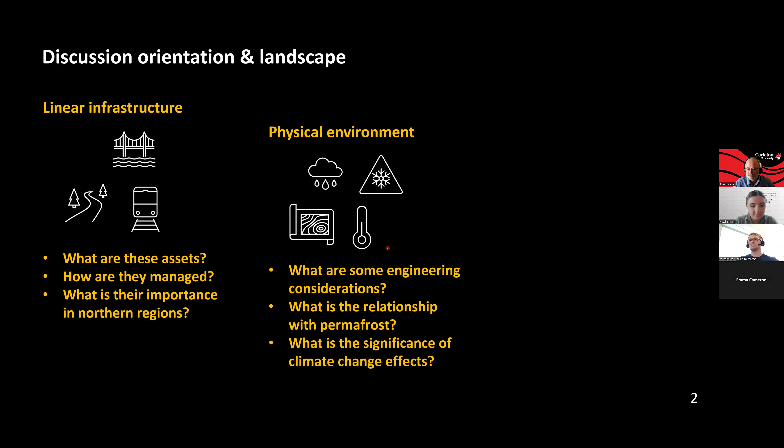In terms of the presentation today, I'm going to provide an overview of linear infrastructure. So what are these assets? How are they managed? And what's their importance for northern regions and communities? We'll try to look at linking that with the physical environment and what are some engineering considerations for the North. What's that relationship with permafrost, and what is the significance of future climate change effects that may impact linear infrastructure in northern communities? And from that, we'll look at some exploration through both case studies and also the importance of collaboration with Indigenous communities.

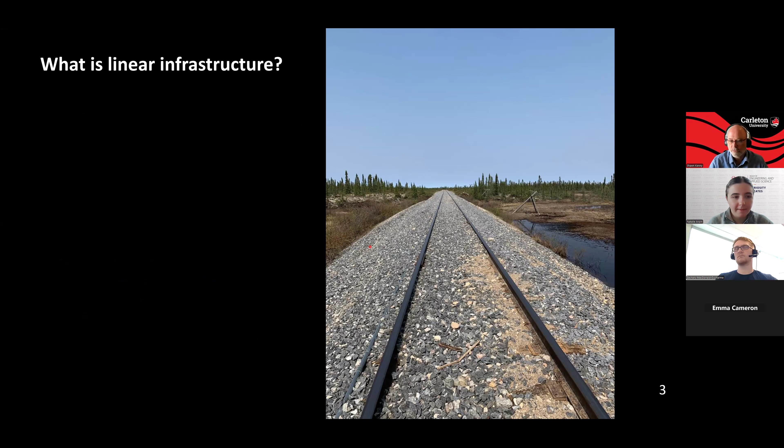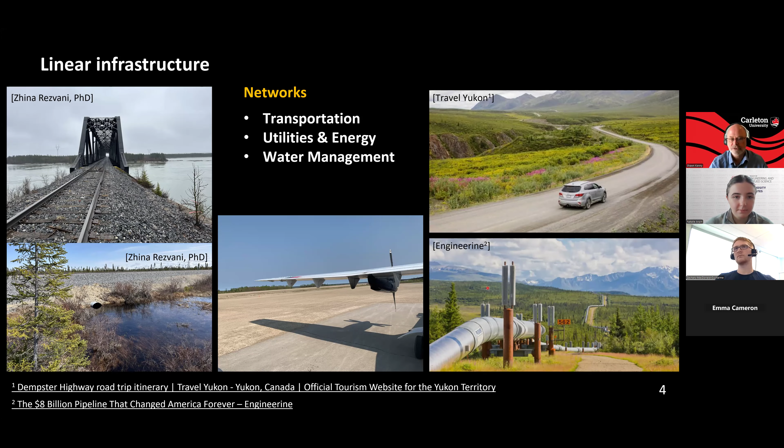And basically, in terms of transportation, they could be multimodal. So they don't necessarily have to just be roadway or railway. We may actually use a mixture of those types of infrastructure components. So for example, when we look at northern Canada in the Nunavut region, the use of sea lift is quite prevalent across the region. In the Northwest Territories in Western Canada, we also use barges through the Mackenzie River to transport goods downstream towards the Beaufort Sea.

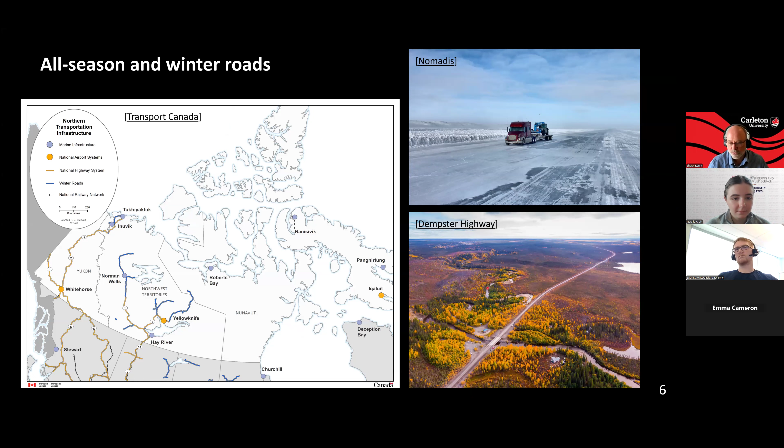We can also see in northwestern Canada, such as Northwest Territories and the Yukon Territory, the use of all-weather roads and also winter ice roads. So we see a prevalence of that type of infrastructure in the Northwest. In terms of railway, as discussed, I'll present through a case study the Hudson Bay Railway, which is in central Canada in the province of Manitoba. And that extends north through about mid-Manitoba up to Hudson Bay and Churchill.

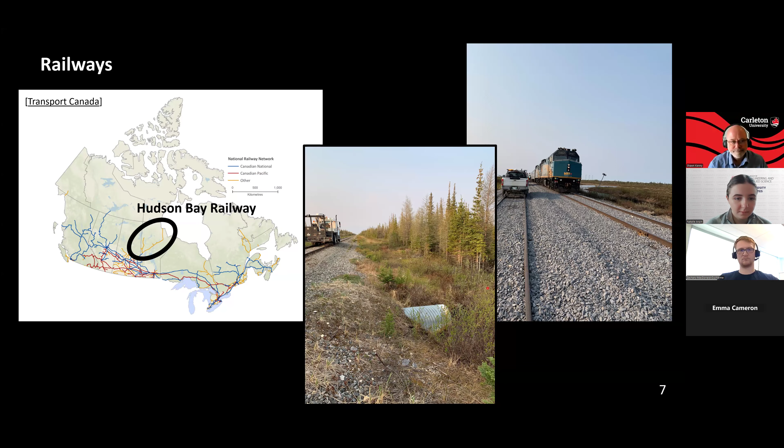In the north in Canada, we have both the traditional commercial airports in Yellowknife and Whitehorse that we think of as a paved or concrete tarmac. But we also see a range of locations where we have remote airports, and a lot of these remote airports will have gravel runways.

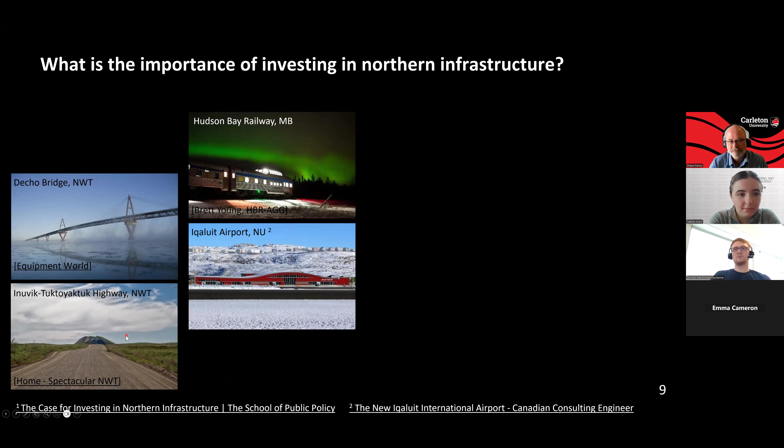So what is the importance of investing in northern infrastructure? And we can see different components of that infrastructure here, such as the Hudson Bay Railway, the Iqaluit Airport in Nunavut, the Deh Cho Bridge in Northwest Territories, and the Inuvik-Tuktoyaktuk Highway in the Northwest Territories. So we see different types of investment in northern infrastructure currently for northern communities.

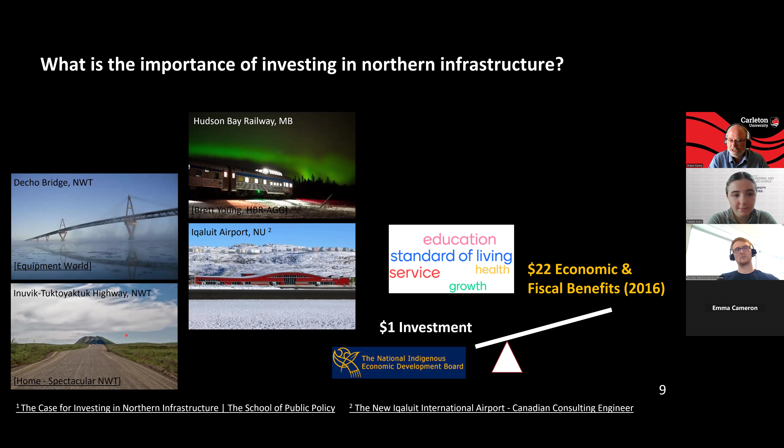And a study that was done by the National Indigenous Economic Development Board was looking at the importance of dollar investments in that infrastructure and showed that there could be up to $22 of both economic and fiscal benefits. So economic benefits to the person and fiscal benefits to the government, for example, through tax revenues. And that's related to education, our standard of living, our healthy lifestyles, food security, for example, and also the services that we rely upon.

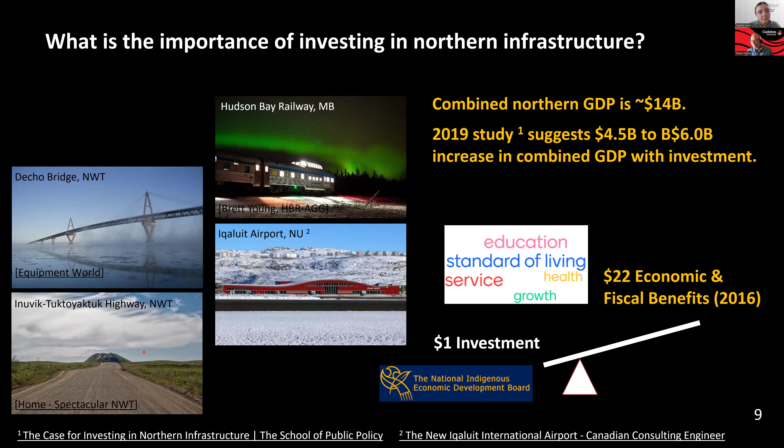Another study is looking at what is the combined GDP of these northern communities within the Yukon, Northwest Territories, and Nunavut. And it's around $14 billion. In 2019, the study suggested that by investing in a greater network of transportation systems for the North, it could add to that GDP by about $4.5 to $6 billion. So how do we relate then the infrastructure that's in the north with the physical environment?

Oops, I went backwards. Sorry, I went the wrong way.

So we can look at that through engineering considerations, and some of these are similar to what we'd see in more southern locations. We have to think about the asset type and the distribution. So, is it a railway? Is it a road? Are there culverts? Are there bridges? We have to think about how we are going to line that linear piece of infrastructure, such as a railway or roadway, which could extend hundreds, if not thousands of kilometers.

So we need to be able to assess the hazards along the route. We need to do site investigations. From those site investigations and terrain analysis, we'd look at selecting a preferred route. And for the north, which differentiates itself from the south, frozen ground engineering is a key component. So the presence of permafrost or the non-presence of permafrost, such as taliks, or other water bodies is a significant component that we have to think about.

The other component that's also different in the north is engagement with local communities, the indigenous communities, through their territorial and treaty rights, so that we can get their input to the project, and also commitment and engagement throughout the life of that project, both through the design and the construction, and then also through the lifetime of that asset.

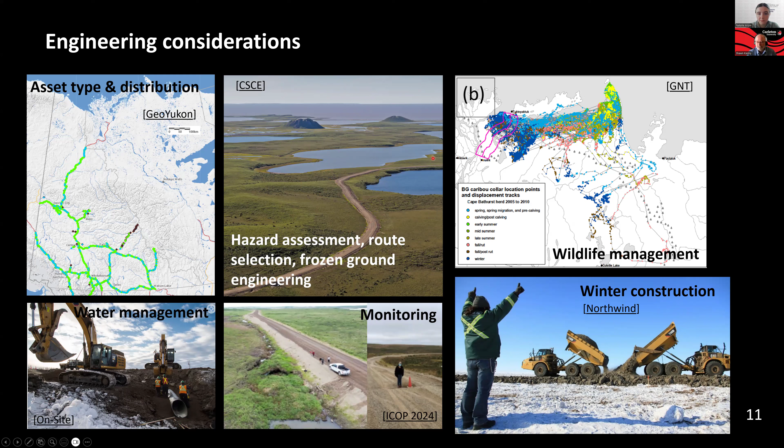It's advancing twice for some reason.

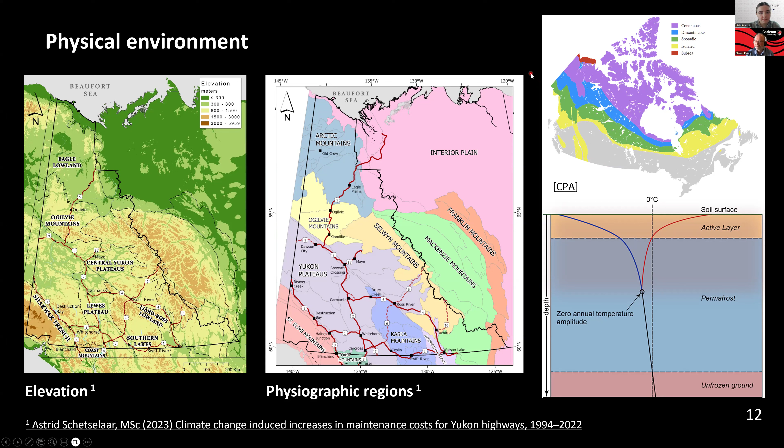We may also, depending on our location, have relatively warm permafrost, so close to zero, and colder permafrost, say -10 degrees. And this influences how the rate of thaw will occur over time.

And we certainly see some of those factors now when we're looking at both meteorological conditions, such as weather patterns, temperature, precipitation, snowfall, and also hydrological factors. So the runoff, for example, during the spring, or peak hydrograph runoffs that we see during the summer seasons in June and July, in some regions.

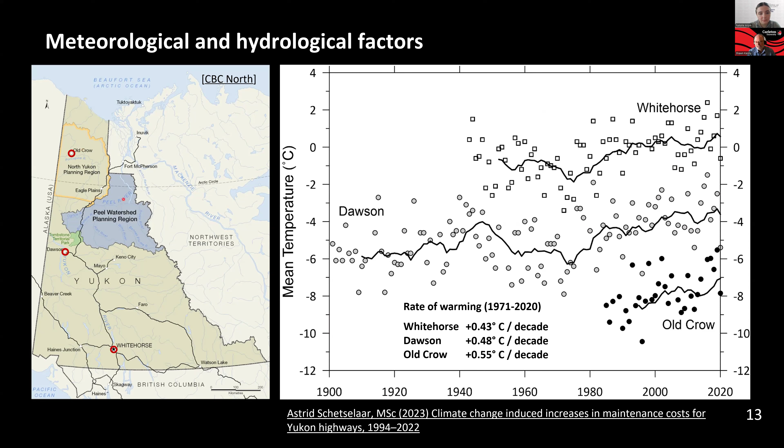So, as we know from climate change, there's a gradual increase in the mean annual air temperatures. And this is also influencing changes in the near-ground surface temperatures and also subsurface temperatures within the ground. And that's affecting permafrost stability, primarily in the form of permafrost thaw.

And from that permafrost, then, in terms of its response to climate change, we see that that can have a broad range of impacts, primarily in terms of just the physical environment itself. It's primarily threatening the way of life and the ability for local indigenous communities to sustain traditional hunting or fishing patterns. It's also disturbing ecosystems, in addition to impacting infrastructure, both in terms of its serviceability, but also sometimes in terms of its integrity or ability to actually perform its operations. So, for example, transport rail or transport cargo along a road.

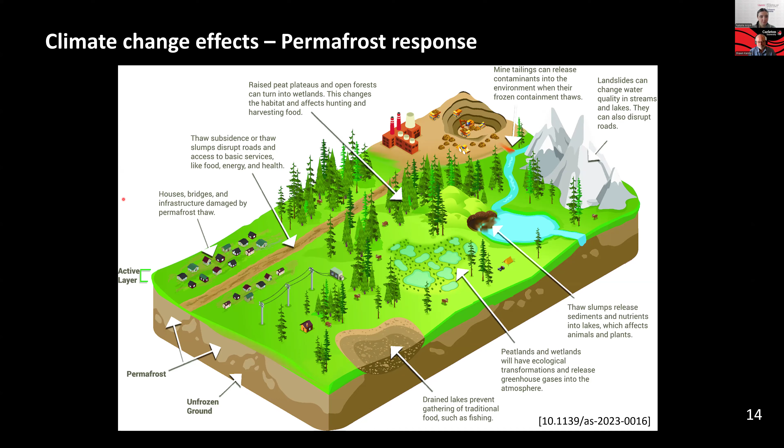There's many others affecting both flora and fauna in terms of those ecosystem impacts. And so climate change is having, in some areas, a devastating impact on the permafrost thaw and also then the local ecosystem and physical environment. And so when we look at our experiences from permafrost thaw and climate change effects, we see that they could be varied across different types of infrastructure assets.

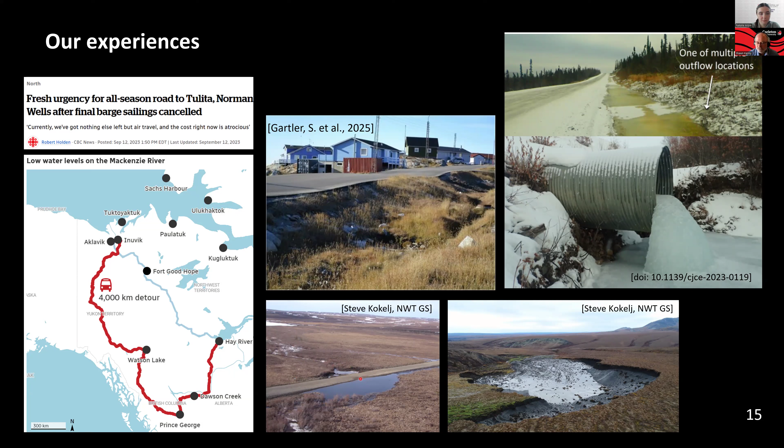And we also see other problems in the middle and also in the lower right in terms of permafrost terrain disturbances, whether they could be retrogressive slumps, thermal erosional type gullies, problems with water in terms of both impacting the roadway and also erosional features of that water onto the system itself. So we see that climate change is impacting permafrost thaw, which is then in turn impacting the performance of linear infrastructure and our ability to move goods or products and services to the north.

And a study that was done recently by Astrid Schetselaar looked at the Yukon transportation system, trying to determine the effects of climate-related costs on the operation and maintenance of infrastructure, primarily highway infrastructure and, for example, culverts in the Yukon territory. The primary trend that came out of that study is a general increase in climate-related costs. Depending on how we look at the data and interpolate through that, we see different rates, but the trend of increasing costs is there. It was correlated or associated with the different physiographic regions.

And in areas with greater than 50% permafrost distribution in that region, the cost magnitude increase was about double that in zones that had less than 50% permafrost distribution. So we see that the effects of climate change and permafrost thaw are definitely being seen in terms of the overall increase in climate-related costs for the Department of Transportation in the Yukon.

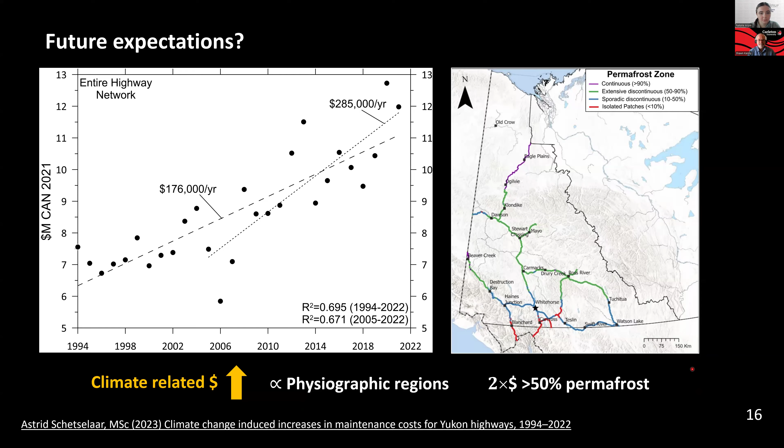So we can then think about different types of adaptation strategies, and some of those strategies are shown here, and they're mostly from the thermal perspective of how do we address climate change and how do we address adaptation strategies for protecting permafrost in these regions.

Shawn, if you don't mind me interjecting. Sure. If you could explain the difference between the passive and active airflow systems in the linear infrastructure design.

Sure. So we can see a number of different options here. And certainly this is a comprehensive study that has been conducted over some time by Guy Doré and others. But we see a series of types of adaptation strategies, from a very simple, passive one of insulation in the upper left-hand corner. And so that strategy is useful when the permafrost is cold. And the objective is to keep that thermal equilibrium of relatively cold embankments or ground beneath the insulation at colder temperatures.

The detractor from this approach is that it also keeps colder air out during the winter from actually penetrating into the ground in terms of stabilizing the permafrost as well. Another simple one is just looking at shading. So in the upper right, we see a sunshed, and that does also have abilities to improve the thermal balance at the surface. And so these are very simple passive systems.

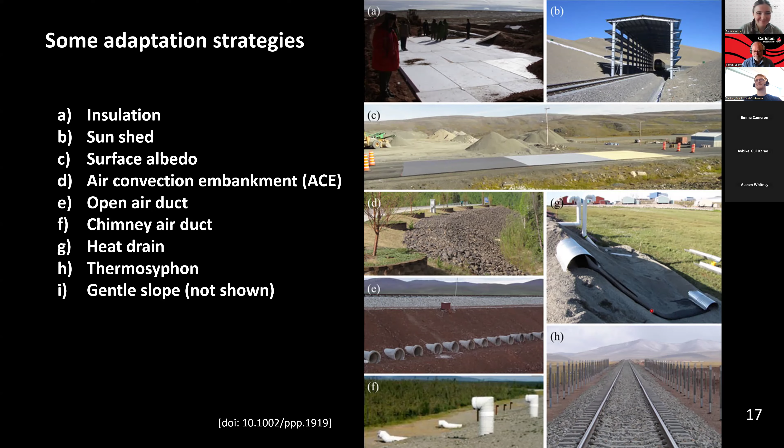So what we see out of that is there's interconnected relationships that we need to think about, and it sort of follows on from that discussion where not only do we just have to think about the one hazard, for example, permafrost thaw and subsidence, but how do we think about snow during the winter, and how do we manage that precipitation, which is more uncertain in terms of predicting what will happen in the future. We have a good handle on how temperatures may change under climate change events, but not necessarily on rain or snow precipitation and also their intensities.

But they all play an integral role with one another in terms of how we manage the snow, because that influences how cold may penetrate into the ground if we have embankments of snow adjacent to the embankment of the road. How that influences water flow during the shoulder seasons, both fall and spring, and how we control icings or glacier control on that system. And what do we do in terms of managing water?

So during the winter, for example, some of these culverts could get stuck or filled with ice and snow, and they may not serve their purpose immediately during the spring. We may then get slides or slumps and washouts and need for repair.

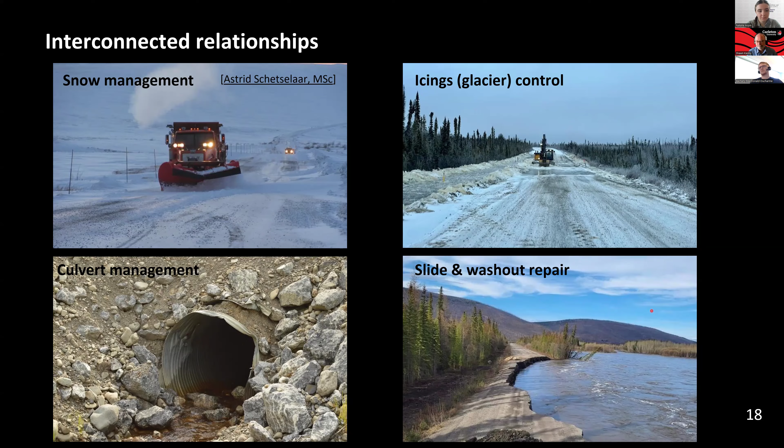And so what we can do is then look at that through two case studies. One is on the Hudson Bay Railway, as we see here on the left-hand side. So we have a drone shot of that image there, where we have a bypass. There's not that many along the rail, but this is one of those. And on the right-hand side, a second case study is in the village of Mayo in the Yukon, in the traditional territory of the First Nation of Na-Cho Nyäk Dun.

So when we look at the Hudson Bay Railway, it's located in Manitoba, so just west of Ontario in sort of central Canada. The railway itself is going from The Pas up north through to Churchill and Hudson Bay. So that's going from this range here in central Manitoba.

Originally, the thoughts about constructing this railway started in the mid 1800s, primarily to get goods such as wheat or other products such as beef to market in Europe. And it was looked at as a shorter route from Western Canada, such as Alberta and Saskatchewan, through Manitoba and out through Hudson Bay towards England, rather than going all the way through the US to New York and out. And so the idea was to build this railway.

Initially it was to Nelson here, but that has problems of sand accumulation at the mouth of the Nelson River. So the thought was then to move it northwards to Churchill. And some of these images here are from the late 1920s; construction began in 1910, was halted during the First World War, and finally the Hudson Bay Railway itself was completed in 1929. And the first shipment of grain was out from the port of Churchill in 1931.

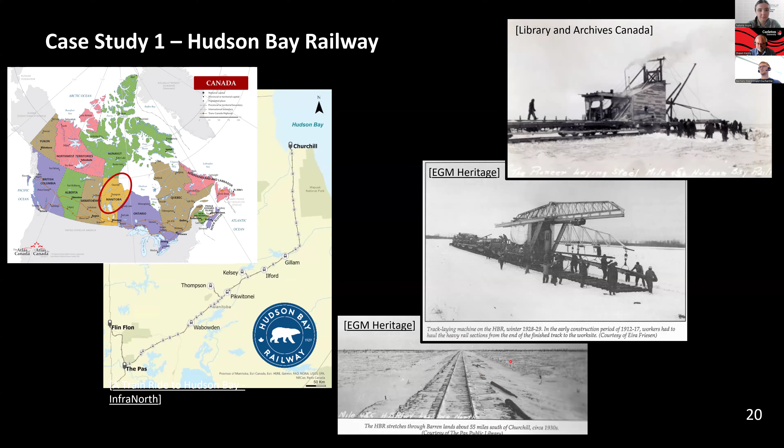And if we look through the Hudson Bay regional physical environment, we see a demarcation of post-glacial marine submergence here in the dashed line. So glacial lacustrine versus glacial marine type conditions. We see variations in the type of terrain units, such as organic layers, fen, or peat plateau, as we're moving from Churchill going south towards Gillam. And eventually, as we get more south and near Gillam, we get into the Shield and boreal forest.

Also, another aspect of that, because of the historical nature of this area in terms of glaciation, we also see as we move south from Churchill towards Gillam that the peat thickness is increasing with distance going south, anywhere from 25 centimeters and varying up to 400 in some areas, with mineral soil beneath that as well.

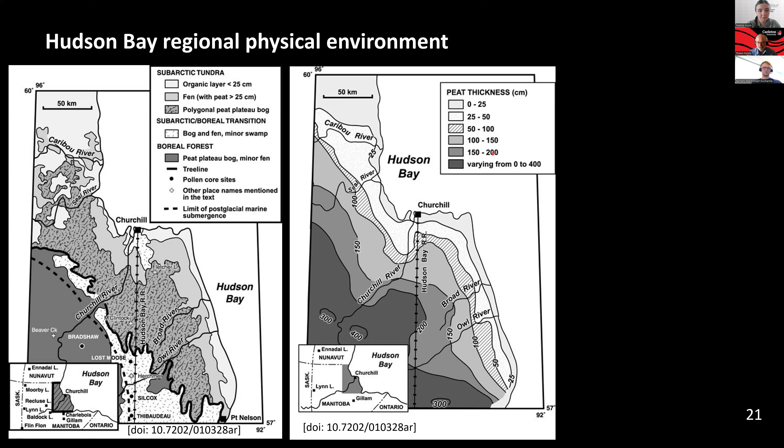For example, on the left-hand side of the image here near Churchill, we see that it's classified as subarctic boreal transition with bog and fen and minor swamp. This picture here on the right is actually just outside of Churchill, and it's one of the first culverts along the HBR, the Hudson Bay Railway, coming out of Churchill. So there are some minor variations locally, but the classification in general gives a good description of that area as we move from north from Churchill to south along the railway.

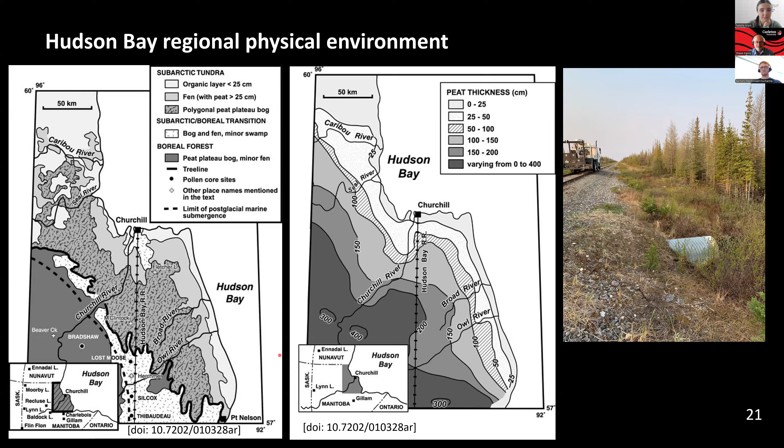So what are some of the engineering challenges that we see? The primary one is in the center picture of a core taken out from the soil itself. The project, and I'll get into some of that detail later, did a series of geotechnical boreholes to extract soil, a core or cylinder, and we can see the soil samples interlaced with ice lenses. The existence of the permafrost itself is a significant engineering challenge, and it has been since the railway was constructed back in 1929.

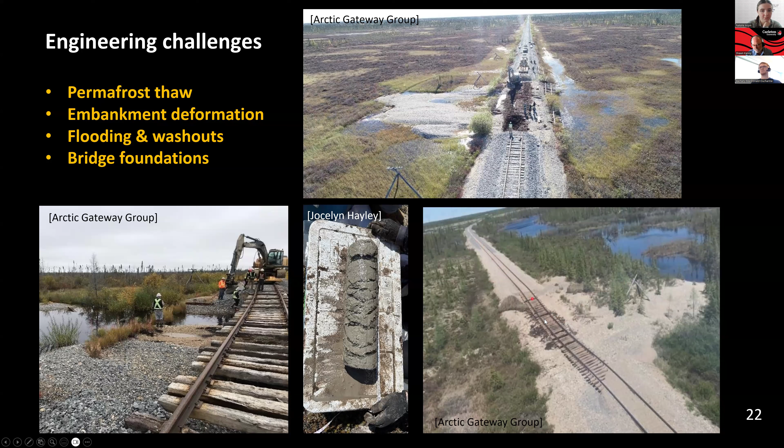The main ones are related to accelerating permafrost thaw due to climate change effects, and that's causing deformations within the railway embankment itself, which might be vertical changes in its elevation or subsidence, also classified as sinkholes from the Hudson Bay Railway's perspective. But as you see on the right-hand side, depending on how it's interacting with water and flooding and washouts, we may also get some lateral spread of that material. We also see in the right-hand picture the wavy nature through that subsidence and change in the profile of the railway itself.

In 2017, there was a significant flooding event, which cut off Churchill from the summer of 2017 until the fall. That caused significant washouts and flooding, and major damage to culverts and some bridges. There are also other issues with bridge foundations along the route itself.

And so PermaRail is a multidisciplinary project in collaboration with Hudson Bay Railway and the Government of Canada through Transport Canada. It's a consortium of people from the University of Laval, Carleton University, where I'm from, University of Calgary, Queen's University, and the Royal Military College. Hudson Bay Railway is a company underneath the umbrella of Arctic Gateway.

The overall PermaRail project is a major project running until 2027, where we're looking at both physical geography and understanding the terrain, for example how lakes drain and the evolution of ice wedges, through to how bridge piers are experiencing frost jacking, and also other issues related to hydrology and geomechanical behavior, as I'll show in the next couple of slides.

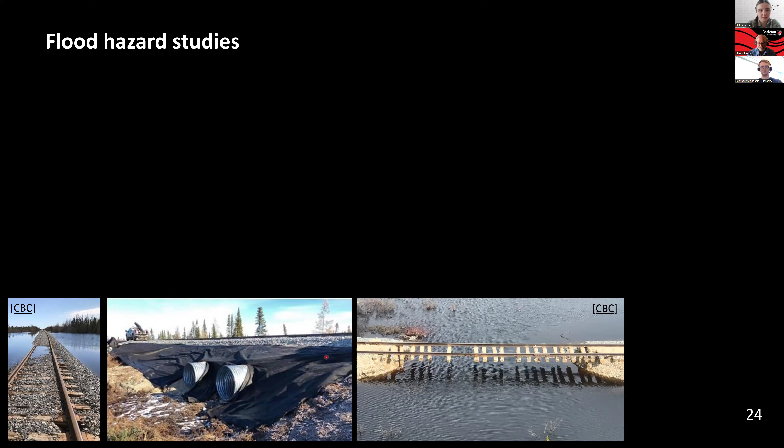From that, they had to go back and replace the embankment and any culverts, and in some areas add new culverts, as we see in the middle here, and put down some geotextile to try to provide some lateral support. In a lot of areas, they also put down geogrid to give lateral stability on the embankment. So I have a master's student, Adeleh, who's looking at a number of issues.

One of the first studies she did was looking at basically the susceptibility and vulnerability of the railway to flooding events. And supervisors are Dr. Élise Devoie from Queen's and Dr. Murray Richardson, who's also from Carleton University.

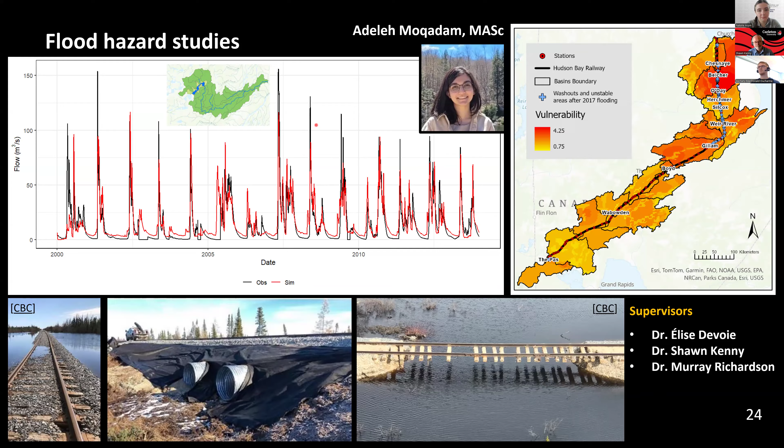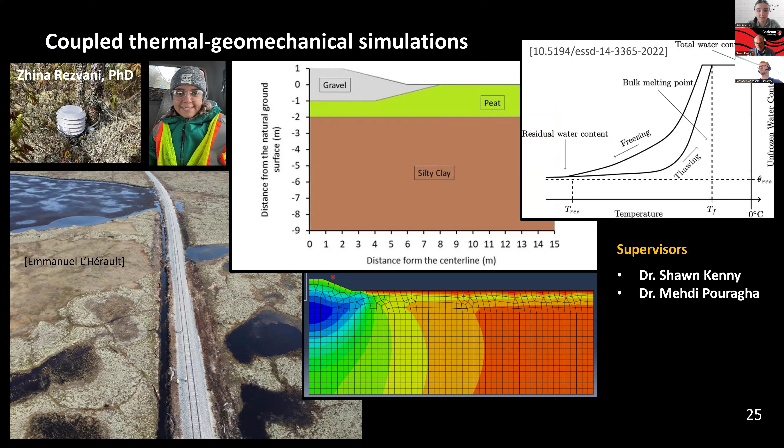One of the key issues will be trying to better determine how the soil will respond. And that's also including some effects about what's happening internal to the soil itself. So although the soil may be frozen, there will be some water content within that soil, depending on the temperature, that's unfrozen. And as the permafrost thaws, if we have excessive ground ice, that ice will change into water, which will then be within the soil itself, but above the ability for that soil to actually carry that water. So then, in part, the soil has lower shear strength or lower ability to carry load and will deform. And so her objective is to basically improve some of these constitutive models that define how the soil will behave under those conditions so that we can better anticipate or predict what may happen in the future.

The second case study is looking at the First Nation of Nacho Nyak Dun, which is in the Yukon. And there's three studies across different scales. And this is being conducted by a PhD student in the Department of Geography and Environmental Studies here at Carleton, with myself and Dr. Murray Richardson as the supervisors. Frederick is looking at both infrastructure within the village of Mayo, also a larger scale along the Stewart River watershed, and also across the entire First Nation of Nacho Nyak Dun traditional territory. And so we're looking at different scales for these studies.

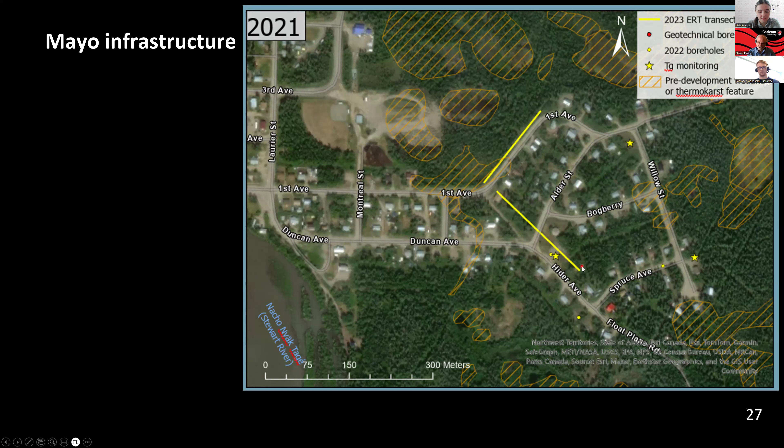One of them is looking at the infrastructure within Mayo, and we have some limited data sets, both in terms of past LiDAR data sets, some boreholes where we have some geotechnical information, and also we've done some aerial drone surveys, so optical, and also have done a couple of electrical resistivity tomography transects, such as shown here by the yellow lines. And so we have some limited data from the past that's being combined with current studies that are being conducted by Frederick. And from that, at least so far, he's able to then establish terrain disturbances.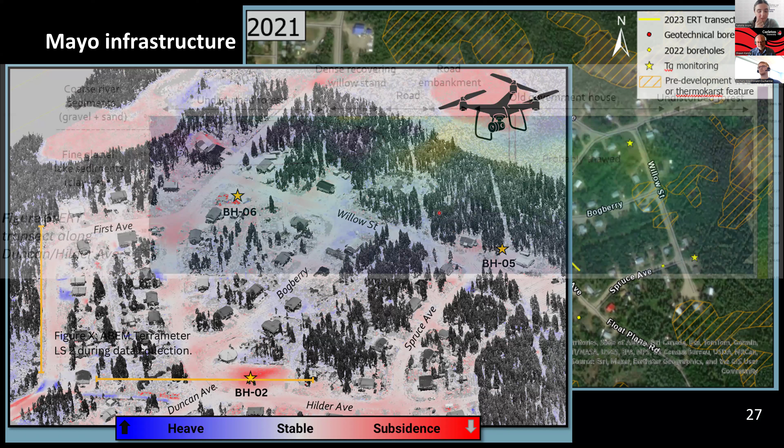So we're able to then use that information, and this really would be helpful in terms of providing that information to the Village of Mayo and also to the FNND, so that they could actually use that in self-determination, so that they can think about how they want to use the land and what kind of plans they will use for their needs going forward, and how they want to express what they perceive as their needs, and believe that this is the best way forward to meet those needs.

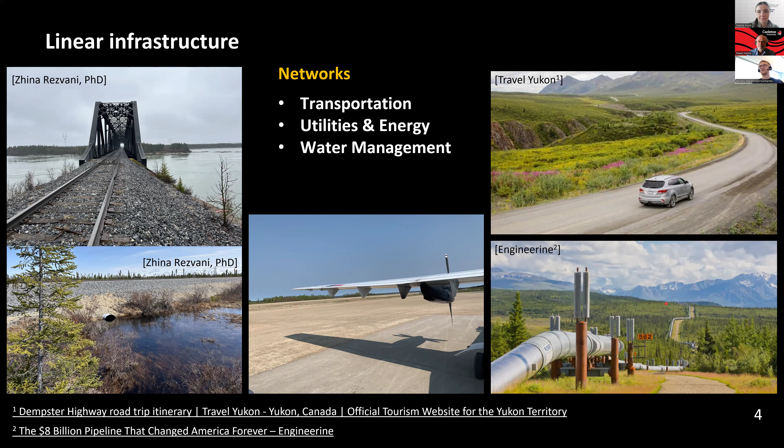Okay, so what we're hoping to do in this part is just to have a quick discussion about Shawn's background, how he ended up doing what he's doing. So it would be great, Shawn, if you could talk a little bit about how you ended up researching linear infrastructure, how you ended up in permafrost, and the path that you took to get to where you are. Sure, thanks. And yeah, it's certainly something that I think could be a discussion rather than a presentation as well.

But overall, I think in some ways a non-traditional path to where I am today. I think that sums it up. I've been across both consulting, engineering companies, applied research organizations, and then eventually, as I am today, in academia.